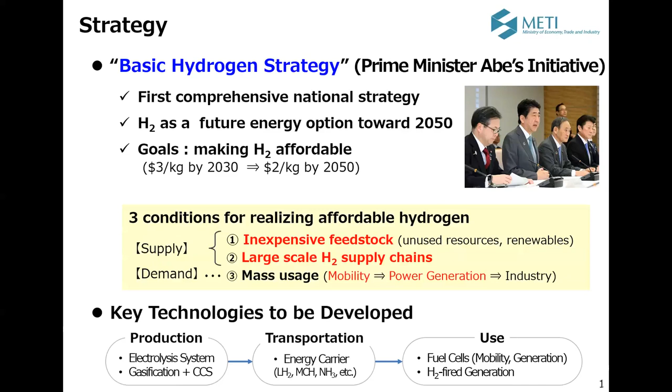This is an overview of our basic strategy, which has a lot of numbers. For example, as I said, the cost of production of hydrogen, we are aiming at reducing it to $3 per kilogram by 2030. And with this cost reduction, we expect the production or consumption volume of hydrogen to go from the current 200 tons per year to 300,000 tons per year by 2030.

To create the demand, we also provide a lot of financial support to expand the deployment of hydrogen-powered systems, such as fuel cell or combined heat and power systems, which currently stand at 280,000 systems as of 2018. But we are trying to increase that to 5.3 million systems by 2030.

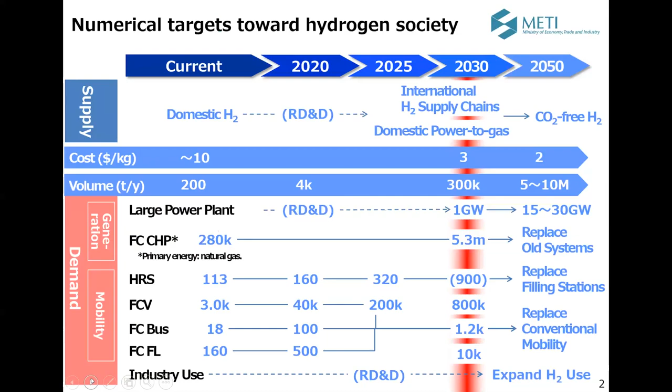Also, in the transport sector, we now have around 3,000 fuel cell vehicles, but we are trying to increase it to 800,000 fuel cell vehicles by 2030. So as such, we have a lot of numerical targets set in this hydrogen strategy.

To further ensure the achievement of the numerical targets set in this hydrogen strategy, we created the strategic roadmap in 2019. We actually revised the old roadmap this year to make sure to identify what kind of policy and measures are needed to achieve the targets set in the hydrogen strategy. So we have set technical milestones, and we identify a set of policy actions that help us achieve the targets set in the national strategy.

For instance, currently fuel cell vehicles sell at around $70,000 in Japan, which is relatively expensive, more expensive than hybrid vehicles. Currently, the price difference between fuel cell vehicles and hybrid vehicles stands at around $28,000, but we'd like to reduce it further to $6,500.

To this end, we also need to reduce the system cost of the fuel cell. At the same time, we need to facilitate the deployment of hydrogen refueling stations. To this end, we are providing subsidies for the construction of hydrogen refueling stations, and we also provide subsidies for the operation of hydrogen refueling stations, trying to reduce both the construction cost and the operating costs.

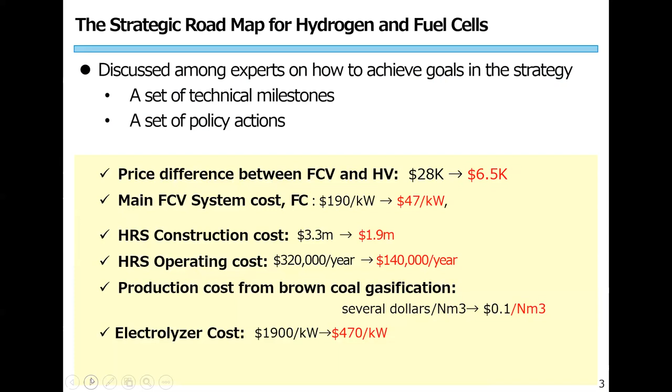So as such, we have created more technical targets or technical milestones to ensure the achievement of the numerical targets set in the national strategy. And this is the overview of the roadmaps. Obviously I don't have time to go into details of every number set in this roadmap, but the point is we have set many technical milestones to ensure the achievement of a numerical target set in the national strategy.

And also we identify a lot of supporting measures as shown on the right-hand side of this slide. So for example, to reduce the cost of a hydrogen station, we need to think about regulatory reform or deregulation of the hydrogen station while ensuring safety.

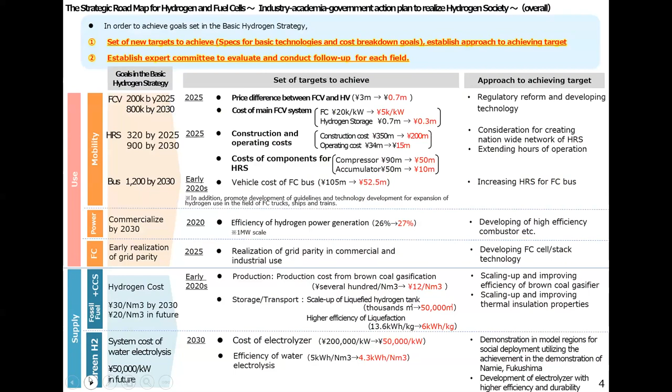And this is an overview of policy and measures taking place in Japan. So, for example, on the production side, we are doing a project to produce hydrogen from brown coal plus CCS technology. Also, we are trying to develop technology to produce hydrogen from solar power generation with water electrolysis technology.

And also on the transportation and supply side, we are supporting the installment of hydrogen stations, as well as supporting projects to develop a large-scale hydrogen ocean transportation network. So actually, we are constructing the first ship to carry liquefied hydrogen from Australia to Japan.

And also on the consumption side, we are supporting the deployment of fuel cell vehicles, fuel cell buses, and forklifts, and also in the building and household sector, we are providing subsidies to deploy fuel cell powered cogeneration systems. And in the future, we are also exploring the potential to use hydrogen for power generation, and to this end, we are conducting a feasibility study to use hydrogen as a source of power generation.

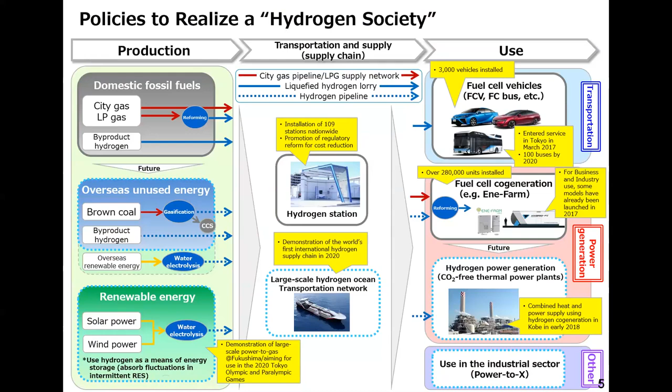And this is an overview of the project on the supply side. So for instance, with Brunei, we are doing a project to produce hydrogen from off-gas, which is unused in Brunei, by using steam methane reforming technology. And we convert that produced hydrogen into chemical substances and carry it by chemical tanker.

And after the product lands in Japan, we are also developing a dehydrogenation facility in Japan so that we can take out hydrogen for further use.

And also with Australia, we are doing a project using brown coal to produce hydrogen. And on the Australian side, a CCS project is going on to store the emitted CO2 in Australia. And we are also developing gasification technology to produce hydrogen from coal.

And also, we are in the process of constructing a liquefied hydrogen tanker, which is a pilot scale, as well as constructing a loading facility in Japan so that we can receive hydrogen carried by liquefied hydrogen tankers. And we are expecting next year the first shipment of hydrogen coming to Japan.

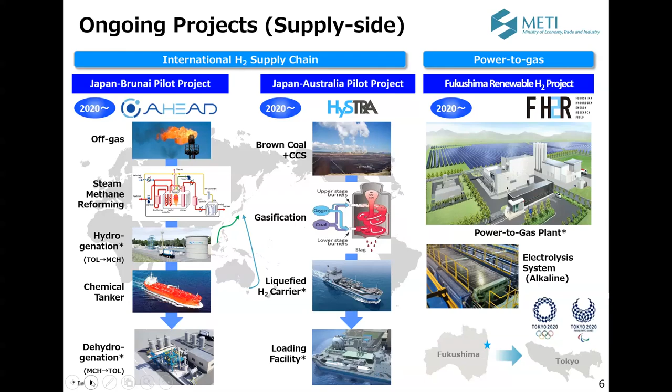And this is the project on the demand side. So we expect to have around 130 hydrogen stations by 2019. And also we are promoting the installation of fuel cell buses or fuel cell trucks, which is a demonstration project.

And also for the hydrogen station, 23 private companies gathered together to jointly form one company to boost the installment of hydrogen refueling stations in Japan.

And also in the power sector, we have demonstration projects to use hydrogen to produce electricity and heat. And there is a 1 megawatt class hydrogen gas turbine already set in Kobe Prefecture in the west part of Japan to produce electricity and heat from hydrogen.

And we have succeeded in producing hydrogen stably and producing electricity stably from hydrogen with this 1 megawatt power generation turbine. And to scale up the power generation system using hydrogen, we need to develop technology to stably burn hydrogen in the gas turbine. To this end, one Japanese company is doing efforts to develop a burner system for hydrogen so that we can use it in large-scale power generation systems in the future.

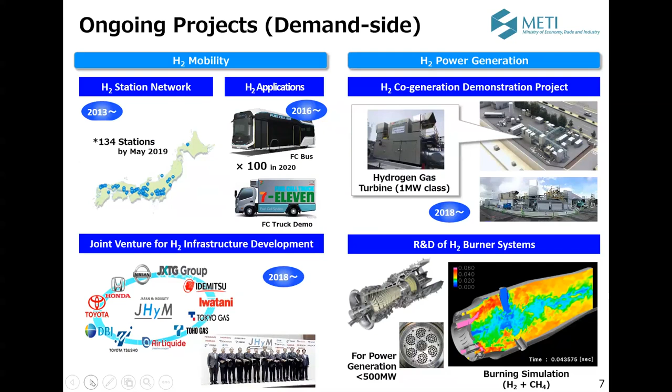For instance, the United States is leading research and development on hydrogen, and they already have more than 7,000 fuel cell vehicles and 25,000 fuel cell powered forklifts.

Japan is also gearing up the deployment of fuel cell vehicles, and also doing the project to establish a supply chain in cooperation with Australia and Brunei, as I explained.

Also in Germany, there are many projects to produce hydrogen from renewable technologies, and fuel cell trains are already introduced. In Paris, there is a project to introduce hydrogen fuel cell powered taxis. And the United Kingdom is also exploring the possibility to inject hydrogen into gas pipelines.

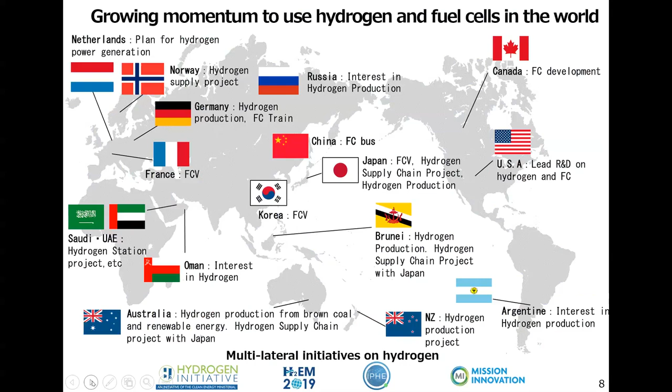Also in the Netherlands, in cooperation with Norway, there's a project to explore the possibility of hydrogen power generation. So there are many projects, and obviously there's a growing momentum for hydrogen.

To further promote international efforts, we have organized the Hydrogen Energy Ministerial. The first ministerial meeting was held in 2018, where more than 300 people from 21 countries, regions, and international organizations attended.

And we have published a Tokyo statement which shows the direction of international efforts to expand the deployment and production of hydrogen.

Also this year in September, we had a Hydrogen Energy Ministerial meeting to follow up the Tokyo statement, and in this meeting we discussed what actions need to be done to further promote the use and production of hydrogen.

And we have published a shared summary, which we call the Global Action Agenda, a set of concrete actions to guide countries' efforts to scale up production or use of hydrogen.

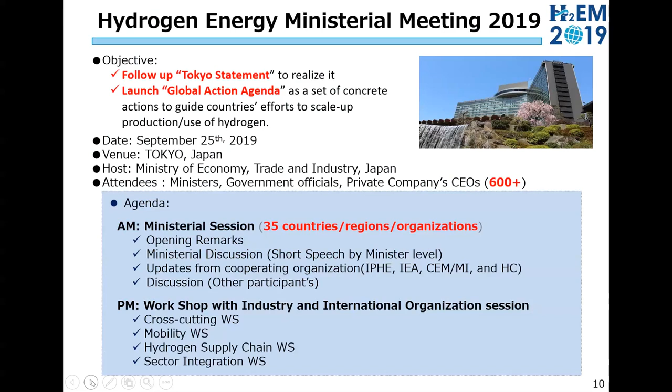In this meeting, more than 30 countries—actually 35 countries, regions, or organizations—attended this event, and 600 people gathered. So the number of participants more than doubled compared with last year, which is another proof of growing momentum internationally for the use and production of hydrogen.

Let me lastly briefly explain the content of the Global Action Agenda. We have a set of actions for a variety of issues, including, for example, sharing aspirational goals such as 10 million hydrogen-powered systems and 10,000 hydrogen refueling stations in 10 years.

This is an indicative, non-mandatory, and collective goal to encourage the use of hydrogen in the mobility sector and to encourage investment in this field.

Also, to establish hydrogen supply chains, we encourage research and development and sharing information among projects. And we'd like to promote investment to further scale up the supply chains of hydrogen.

For sector integration, we'd like to expand the use of hydrogen in various sectors, including industry, transport, building, and households. We also take on issues such as study and evaluation of hydrogen's potential with help from international organizations such as the International Energy Agency, IRENA, and ERIA.

We also think it's very important to continue communication, education, and outreach to increase public awareness of hydrogen use, and to disseminate information and conduct campaigns.

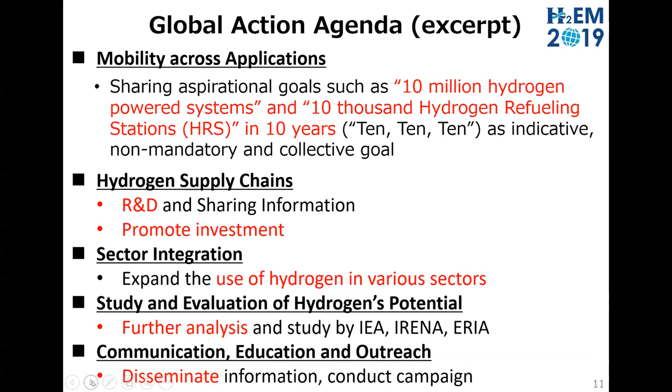Thank you very much for your kind attention. This is an overview of our efforts to promote the use and production of hydrogen in Japan. Thank you very much once again.